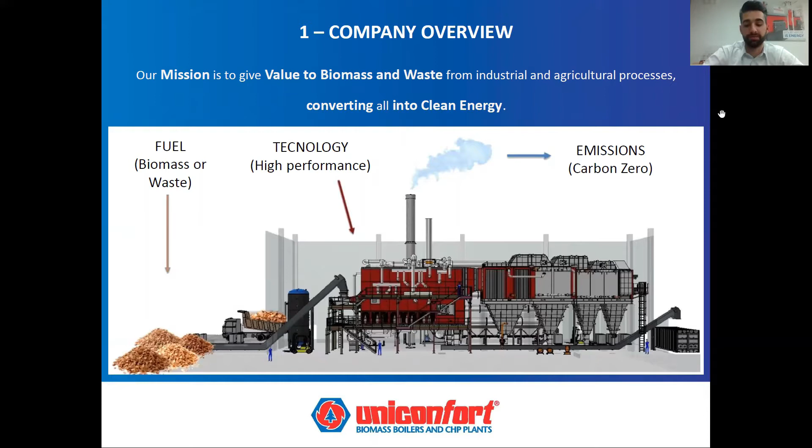The company is located in northern Italy and was founded in 1955. Today we count more than 3,000 installations all over the world, divided between thermal power plants and cogeneration power plants. Our product range for the heating part is between 200 kilowatt and 30 megawatt, meanwhile our electrical power output is up to 5 megawatt. Our strength is our capability of managing a wide variety of solid wastes, thanks to over 60 years of experience in biomass and waste applications.

Also thanks to our internal research and development center, which is specialized in new fuels, we supply always reliable technical solutions. Another important point is that we provide customized plants based on standard, modular, and pre-assembled components that result in fast and easy installation and low maintenance and operational costs.

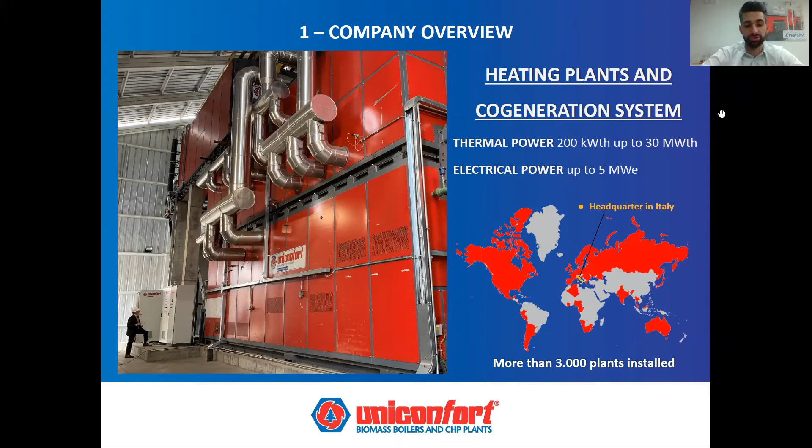We are committed to fighting climate change. We can help our customers reach their carbon zero goal thanks to the CO2 reduction achievable with our high efficiency plants.

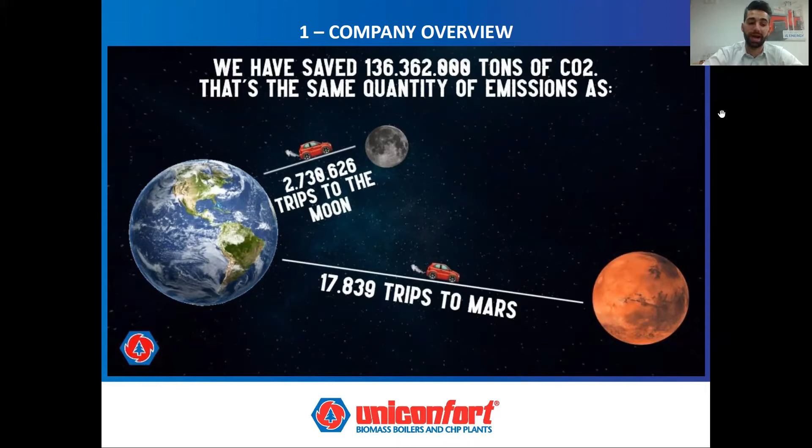Okay, so after this short introduction, I would like to make a general overview of our combustor technologies, which are the heart of the waste-to-energy plants and also our core business.

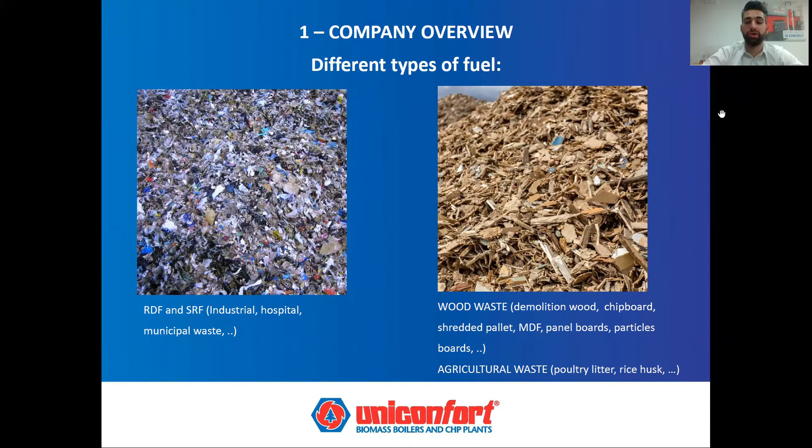We believe that waste from industrial and agricultural processes will be one of the main sources from which to obtain cleaner and cheaper energy, eliminating the high cost of waste disposal and at the same time being environmentally friendly, avoiding the usage of fossil fuel.

Our combustion technologies are based on rotary kilns and movable grate burner systems. With the rotary kiln system, we typically manage the combustion of industrial, hospital, and municipal wastes, such as RDF and SRF. At the same time, our moving grate technology is designed for a wide range of wood waste, such as demolition wood, particle boards, and MDF, but also for agricultural wastes like poultry litter, straws, and rice husks.

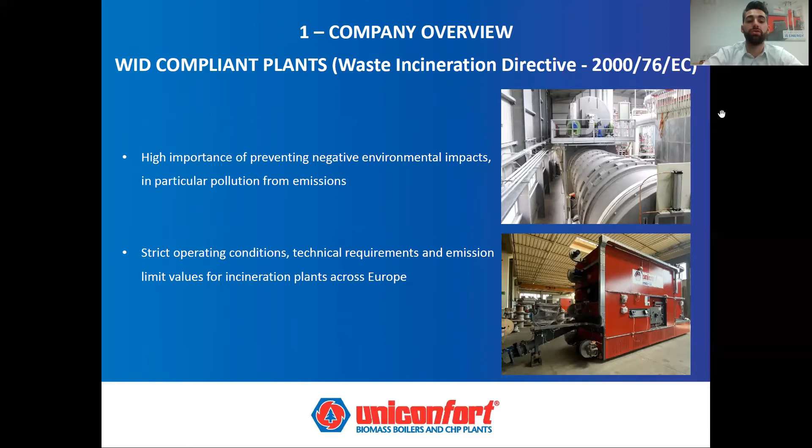In both cases, it is important to prevent the negative environmental impact that the combustion process of wastes might have. For this reason, we design plants to be compliant with strict operating conditions and very low emission limits in accordance with the most restrictive European regulations.

I will now leave the floor to Stefano, who will continue with the technical descriptions of our combustion technologies. Thank you for your attention and enjoy the presentation.

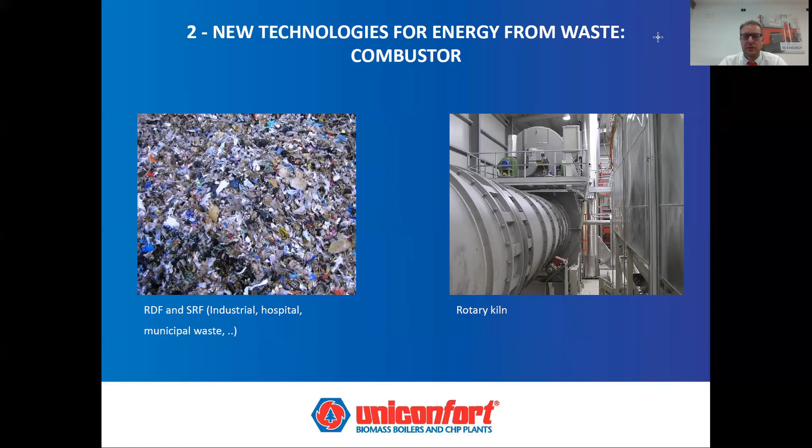Uniconfort is proposing two major technologies for combusting waste. In particular, when we talk about RDF and industrial, hospital, and municipal waste, we deal with this type of waste through a rotary combustion kiln. The technology is an easy technology, with high versatility in the waste management process.

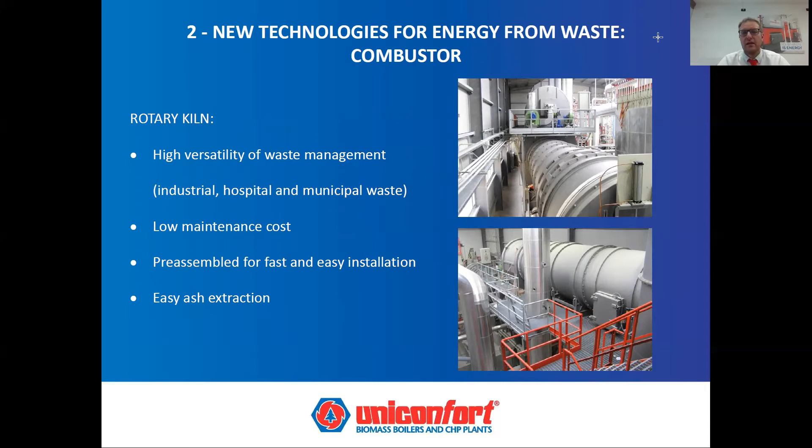The technology is commonly pre-assembled at the production facility, so it's easy to install on site. It's a technology with very low maintenance cost, and one of the specific advantages this technology may have is easy ash extraction, which is important when we talk about RDF or municipal waste, because they are generally fueled with a high level of ash content.

The second technology which Uniconfort is proposing to the market is the moving grate technology. In general, we propose this technology when we are dealing with demolition wood, MDF, panel board, and particle board.

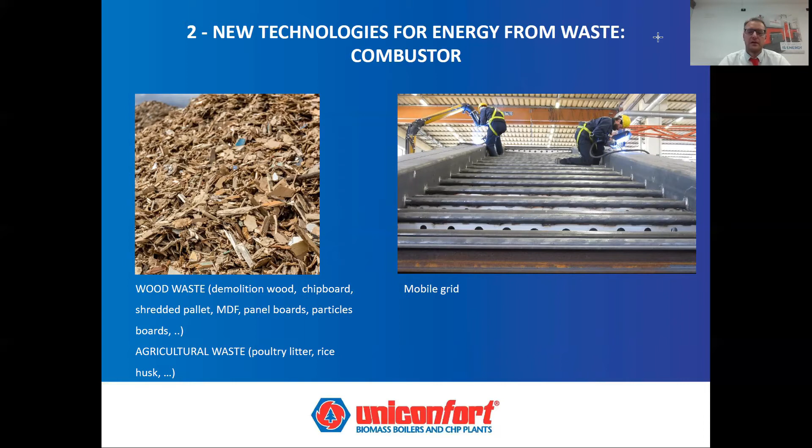Technically speaking, even here, one of the advantages that we have with the moving grate, a water-cooled moving grate, is that it's a grate which can deal with fuel with a very low melting point, in general extremely dry material with a very high calorific value. By having a cooled grate technology, we can make the combustion in a very good way.

But we are also paying particular attention to keeping the maintenance cost low, so that when we are dealing with such a type of fuel, we don't incur a high level of maintenance cost. From a production point of view, the grate is done in a modular way, and therefore, even with a big capacity, we are able to make an easy transportation from the production facility to the site, and it also reduces the erection time of the plant very significantly.

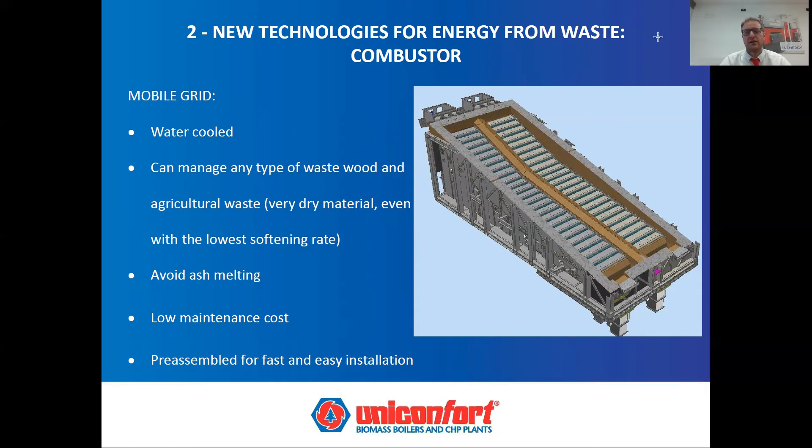Let's now talk about the heat recovery. Even here we have two, even three different types of system, which can be used, as we said earlier, both on the cogeneration side and in the steam process. On the cogeneration side, we in general propose the thermal oil system connected with the ORC, or the steam side with the steam turbine.

In one part, we propose the oil heat exchanger with the radiant part, which is located just above the moving grate, or in exactly the same manner, with the water tube boiler, we have a radiant zone located exactly on top of our grate system. And in both cases, we have the convective zone and the economizer zone located just beside the grate.

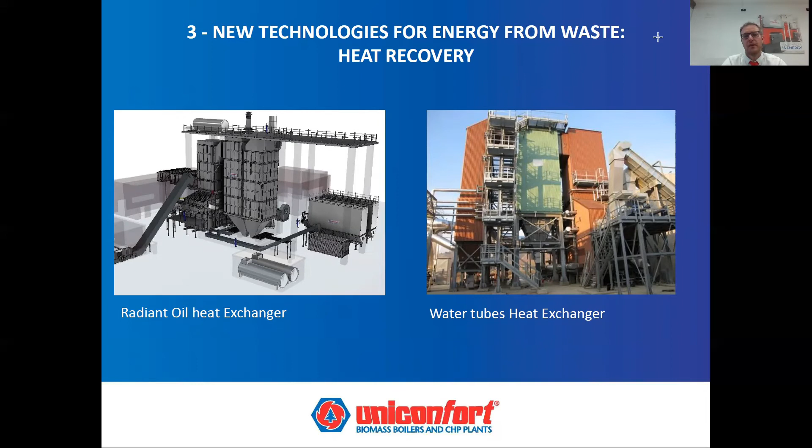The third technology is commonly used for the steam process, in a size up to 10 tons of steam, and it's a technology that we like to call a hybrid technology. It's called hybrid because it uses a water tube pipe on the radiant zone and a fire tube boiler on the convective zone. One of the important things about this technology is that it is much more cost effective than the previous technology.

Second, we can propose a plant up to 10, even 12 tons of steam without a big impact on the dimensions, and therefore without incurring a lot of cost for transporting and for the erection on site. But also, from an emission perspective, it is a technology that can deal very well with the NOx emission level.

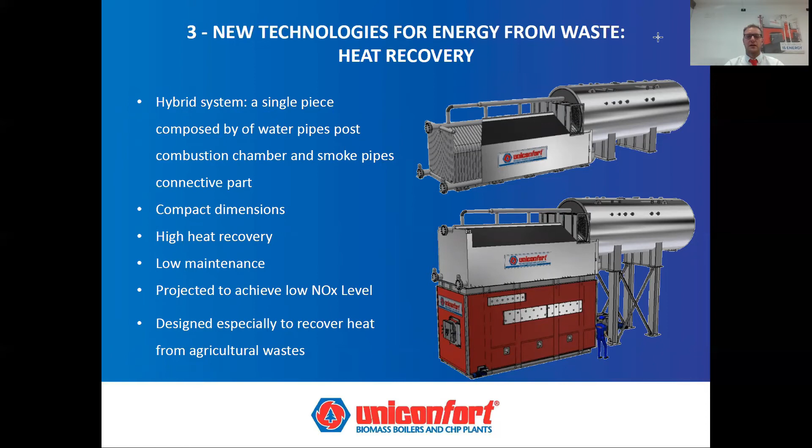Now, let's carry on with the fourth part of the presentation, and we are going to talk about the technology Uniconfort is proposing in waste management recovery. I would like to talk about three different types of technology, which in this type of plant are in general used all three together. Sometimes only two can be used, and this depends on the chemical analysis of the waste that we are going to deal with, but also on the level of emission that we have to achieve.

Just to start, the filtration, like the bag filter or the electrostatic filter, which is a very common technology in the market for conventional fuel, but also for unconventional fuel. The bag filter is a very high efficiency filtration technology, which can achieve a very, very low level of particles into the atmosphere.

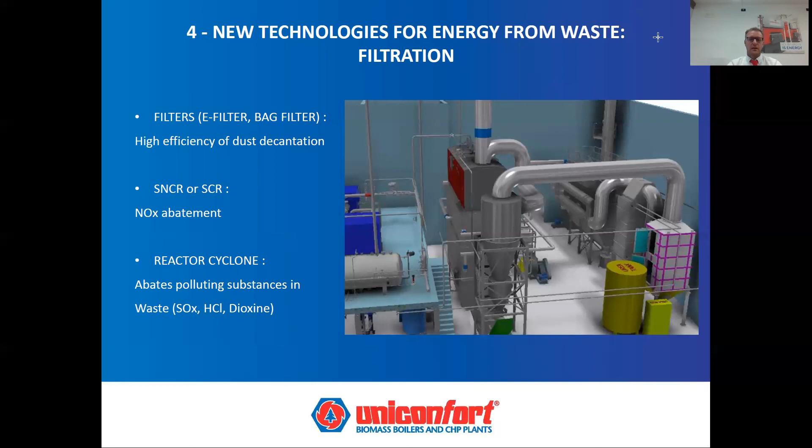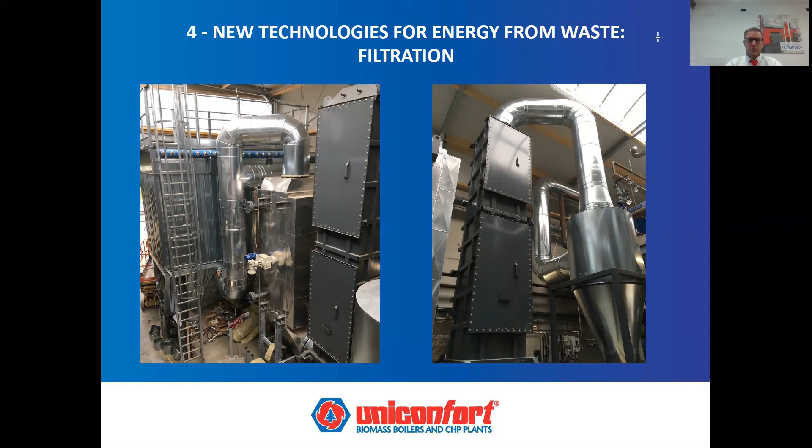So this is a picture just to show the different types of filtration technology that we just spoke about. We can see the bag filter, the cyclone, and also the SCR. So this was the last topic.